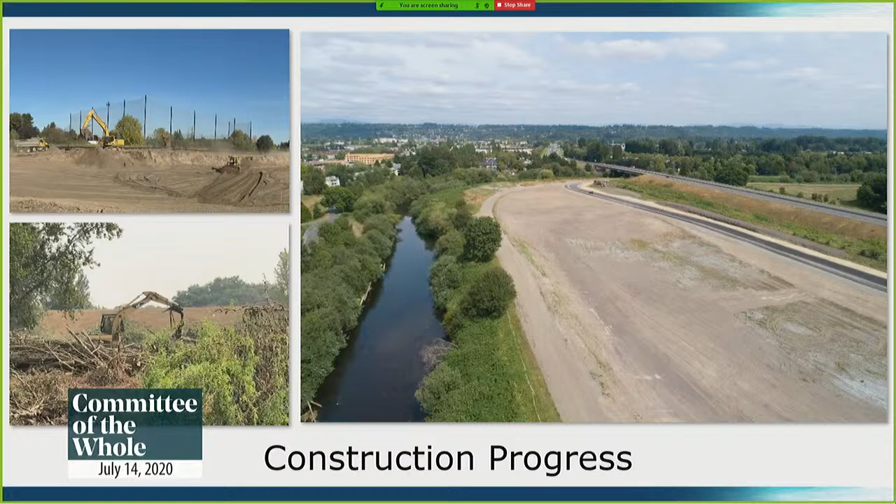So we've made a lot of significant progress on the project, and the images you see on the screen are images of that progress. But moving ahead to the next slide, there's still a lot of work left to complete. We have to remove the remaining material from the site, about another 100,000 cubic yards. So we're probably about halfway through the excavation.

We've got to place about 50 habitat structures, so log structures. We really have to plant about 30,000 native plants. So the image you see here is kind of a top-down view of what the final site would look like.

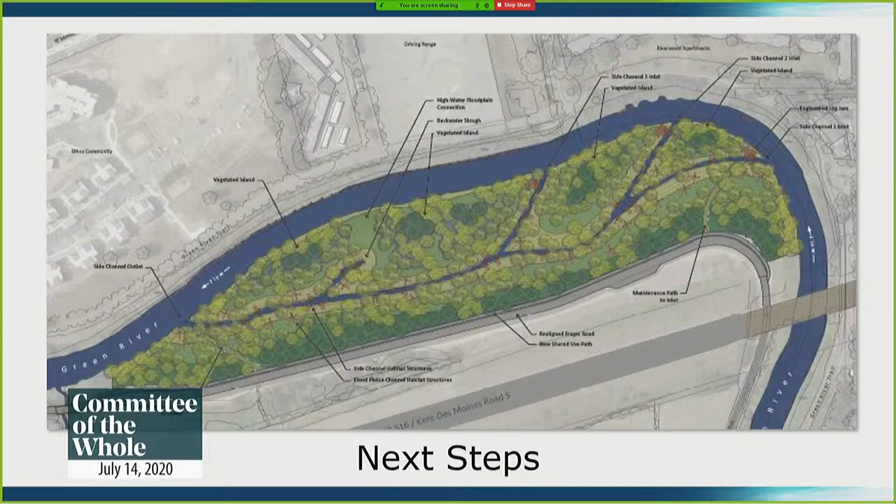So you can really see the braided side channel that is significant for this project, a huge element allowing habitat for the salmon in the area, but it also does a pretty good job of showing the habitat structures and the main channel that will be there. So carrying on, kind of where this whole conversation comes into play.

So the project is partially complete, and in order to support the completion of the remaining work, the city was really fortunate to be awarded about $1.4 million of funding from the King County Flood Control District by way of their Cooperative Watershed Management Fund.

The table you see on the screen is the funding we received to date for construction for this project. I'm not going to go through every single dollar figure there, or we'd be here all night. But I really want to illustrate that this project has received significant support, both on a local and state level, but especially from the Cooperative Watershed Management Fund.

We've received almost $2 million from them in past years for this project. So this $1.4 million is really just an extra added bonus of support that we've received from the Flood Control District. I do want to say this is a really unique grant in that it doesn't require any match dollars. And it's nice because the funds will be made accessible to us as soon as we approve the agreement. So it's a very quick turnaround grant.

It doesn't have match dollars. We're able to use it immediately and for a significant portion of the work. And our plan moving forward is actually to use these funds to complete phase 3 later this summer.

And so moving on to the next slide, you'll see, I'm sorry, two more slides. Yeah, there we go. So earlier this year, the city actually bid for what we're calling Downey Phase 3.

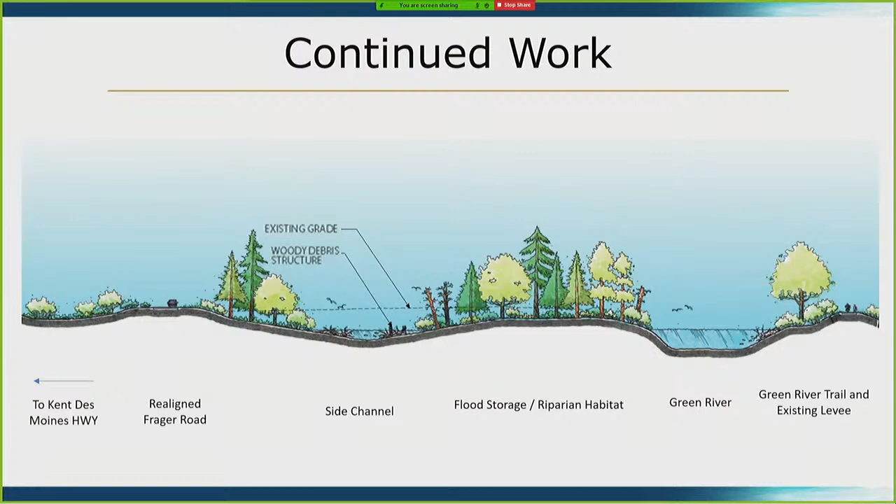And with that, on to the final slide. The acceptance of these grant dollars will allow for the continued annual progress of this project. Every year since 2018, we've had at least one phase of work happening. So we've continued work, and we've done a good job illustrating that the city is serious about this type of project, and it illustrates our desire to continue this work towards other grants we're pursuing. We are pursuing state grants known as the Puget Sound Acquisition and Restoration Fund and the Floodplains by Design Fund, both of which are very highly competitive state grants.

And the continued funding from grants such as Cooperative Watershed Management will really show that the city is interested in completing this and doing this work. Finally, I just want to say thank you to council for your continued support. You've allowed me to continue pursuing these types of grants. You've also supported the city continuing this work itself, the construction. So I'd like to say I appreciate that support. And with that, that's everything I have.

Madam Chair. Yeah, I just want to thank you, Melissa. You don't have to thank us. You're doing a lot of hard work, and we appreciate what you're doing.

Councilmember Thomas: Thank you, Council President. And Melissa, I would echo what the Council President just said. Good work over the years. It's not like it's an overnight kind of event or project. Can you tell me, or I don't know if you know this or not, how much money will you need to complete this particular project?

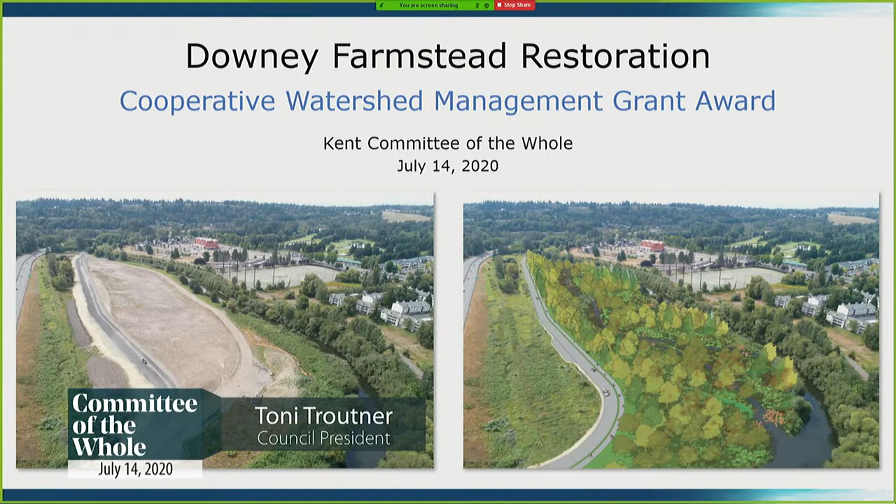Thank you. I just want to point out a couple things. You showed that project funding slide, and it's really great. You see how important these partnerships are when it comes to funding these big projects. Like you said, it's not something cities can do on their own. We're fortunate to have great relationships with these groups and staff working hard to help us navigate these programs and get this work done.

I participated in a state salmon recovery briefing on Monday, and this Downey project was on their list, so I got to brag a little about all the work we're doing along the Green River. It's important to remember we're doing this for flood control, but we're also incorporating salmon habitat and restoration into all the projects we do. These multi-benefit projects are really important, and we're setting a great example for other cities, because we're doing such a great job here in Kent.

Thank you so much, Melissa, and thank you to the staff that is always working on fighting for Kent for these grant programs and this money, and for all the work we're doing to keep our community safe and to save the salmon. Thank you.

All right, moving on in the agenda, we're going to welcome Rob Brown, who will give us information on... oh, sorry, let's back up really quickly. Are there any objections to moving that grant through to council for authorization? I'm guessing nobody's going to oppose that at this point, so for the record we'll go ahead and move that forward.

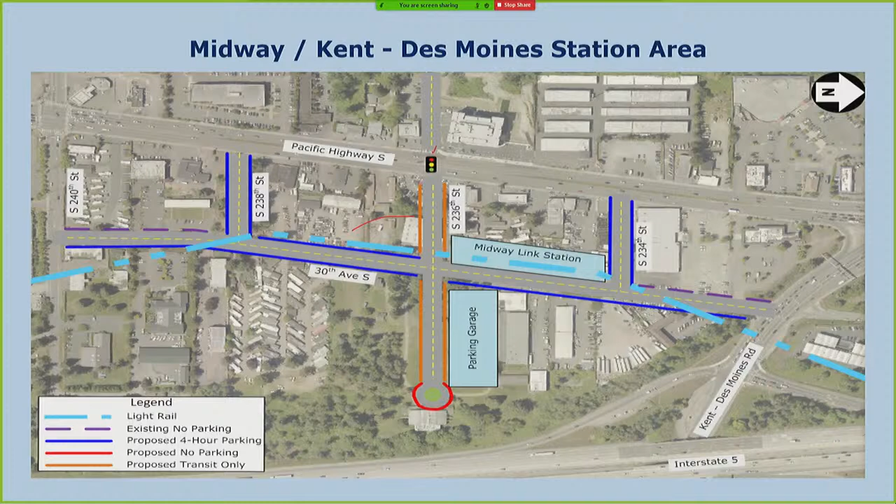So the proposed parking on the weekend, 4 hours, I'm assuming that's free, right? Not a charge for that? Yes. And we're doing the same thing downtown today? Yes, that's correct. These parking restrictions mimic what we have in the downtown area.

Okay. Then my other question, just overall, with COVID-19 and so on, where are we at with Sound Transit? I'm assuming they're not on the original schedule. Do you have any idea where we're at with the agreement schedule-wise?

I don't know for sure, and I will certainly find out and get back to you, but I believe they are either on schedule or very close to it. They didn't slow down at all. We're still having meetings. Mr. Peterson is still representing the city and doing a great job keeping all of our city's interests looked after, and they're still moving full speed ahead. But I will find out for sure and get back to you.

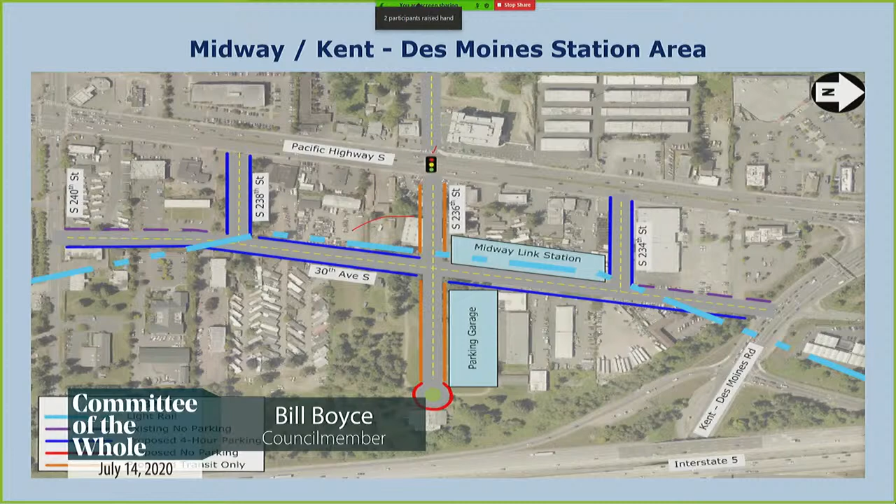And there's no major stumbling block, as you know, we're moving forward, what you're saying, right? Pretty much. Yes, sir. Okay. Thank you, sir. Good presentation.

Thank you, Councilmember Larimer. Oh, go ahead, Rob. I was just ready for the next one. Oh, Councilmember Larimer. Thank you, Council President. Rob, can you just remind me, what is that building on the east side of the no parking cul-de-sac?

Is that a building? I believe so, but I don't know off the top of my head what it is. My only question would be if that's residential apartments or something - does parking apply to them?

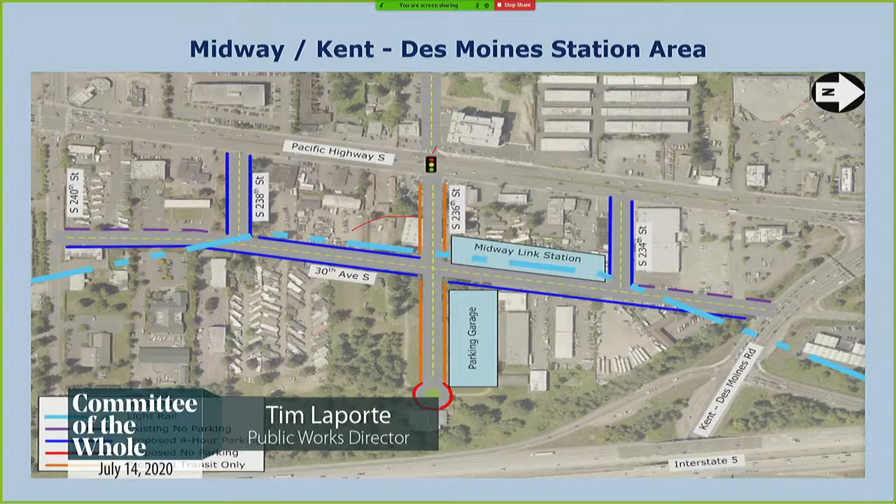Councilmember Larimer, that is the old building that Sound Transit has bought. It's part of what used to be called Park of the Pines, a conference center, Christian conference center. It's an odd shaped building, not residential.

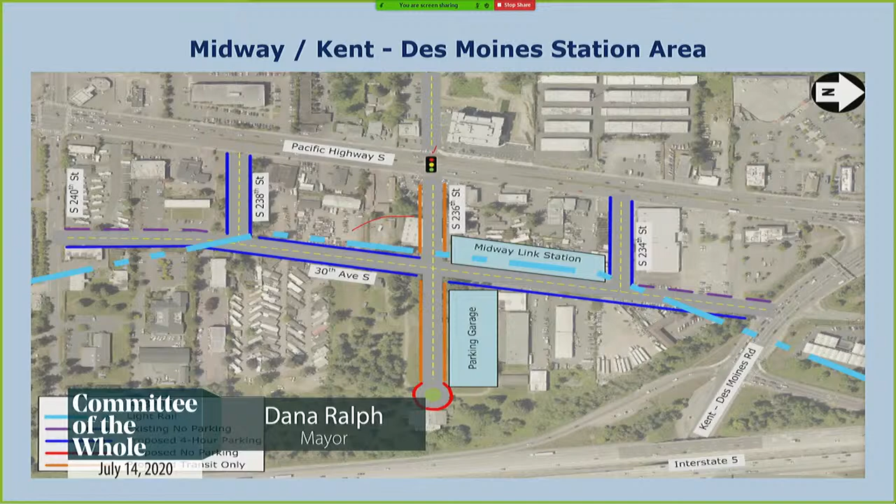Madam Mayor, just a quick update - Councilmember Boyce, to my understanding Rob is exactly correct. Sound Transit is really on time on our project. There was a short shutdown on some construction, but it's definitely back up and running. In fact, today they were doing demolition on the last building there along 30th that needed to be taken down. So things are moving forward as planned. Thank you, Madam Mayor, appreciate that.

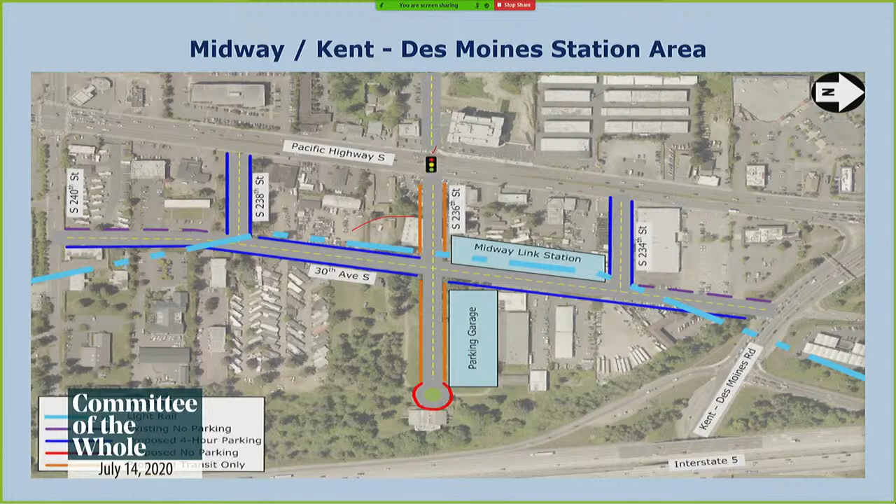All right, thank you so much for that information. Oh, I still got two more. Okay, keep going, sorry. Right, so yeah, three locations.

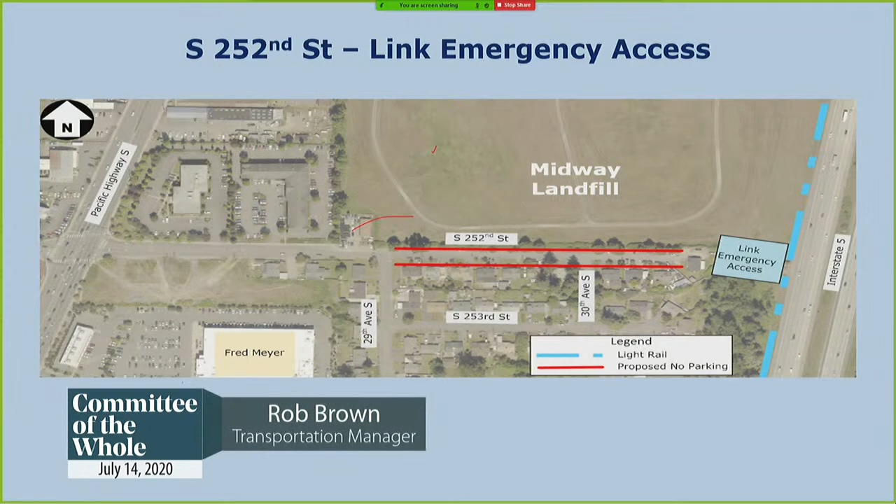We have not. There's very little on-street parking on 252nd between 29th and 30th Avenue, but from 30th Avenue to the end, there are a lot of old cars, abandoned looking cars, and older RVs and things parked on the north side of the street. We have received several complaints over the years about some of those vehicles left in that location, but we have not actually reached out to the neighborhood yet.

Councilmember Boyce: Thank you, Madam Mayor. I know we're probably years out, but I'm hoping someday we have some major development on that landfill. Will we be locked in a way that we can't make changes if there's a major development on that landfill, 3 to 5 years out someday?

Not as a result of this. If there is a redevelopment, they will have them redevelop that at the north side of 252nd to whatever development standards the street classification calls for, depending on what it is. We can have them do on-street parking, and then we could come back to you and remove that parking restriction - the same way we implement them through a code change, we can also remove them the same way. Okay, thanks Rob. Any other questions for Rob on this particular slide?

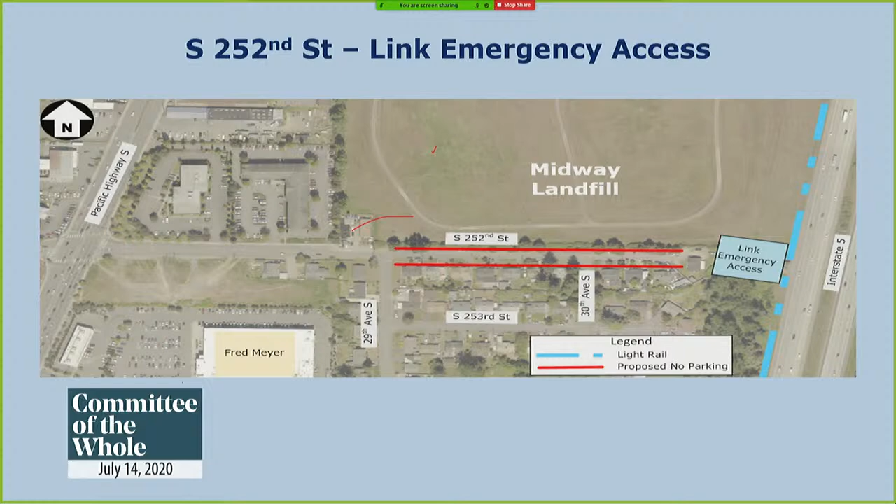So with that, I'll be happy to answer any questions or entertain discussion. All right, any questions for Rob on this particular area? Okay, I don't see any hands raised.

So will this come back to council eventually? Yes, ma'am. This will be part of those neighborhood parking restrictions that we'll come back with all together. We'll wrap these into the ones we talked about in April as one package, and we can go through all of them again to make sure everybody's comfortable with those as we go forward. Perfect. Any other questions for Rob before we move on?

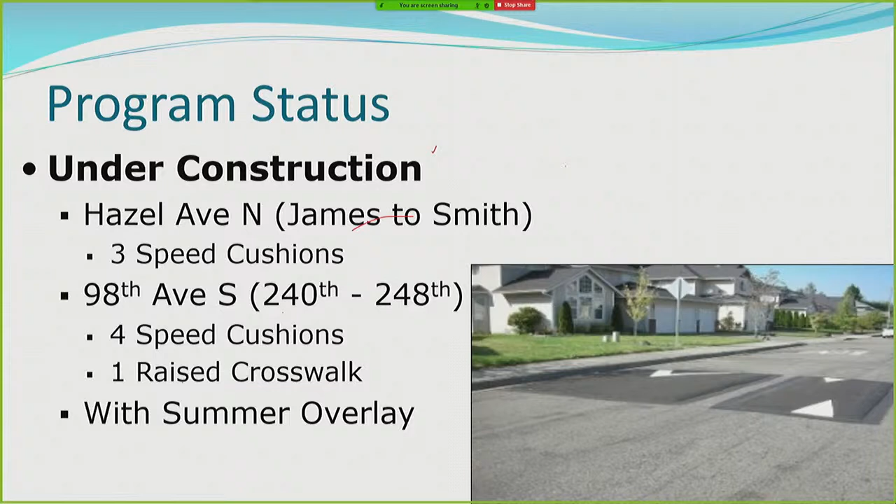We also have 2 that are under construction, detailed on the next slide. We have Hazel Avenue North between James and Smith Street, which will get 3 speed cushions this summer. And 98th Avenue South between 240th and 248th will have 4 speed cushions and 1 raised crosswalk in the middle. The plan is for that to be completed during the summer overlay, so coming soon.

So I've got a lot of work cut out for me, but I'm excited to do that and to help the people of Kent. I'm here to take any questions that you might have.

Thank you so much for that update. Any questions or comments for Erik? All right, I don't see any hands raised. Like you said, you've got your work cut out for you. So I guess the next time we get a report on the projects, we'll hopefully see some that have been completed and resolved. So thank you so much. You're welcome. Thank you.